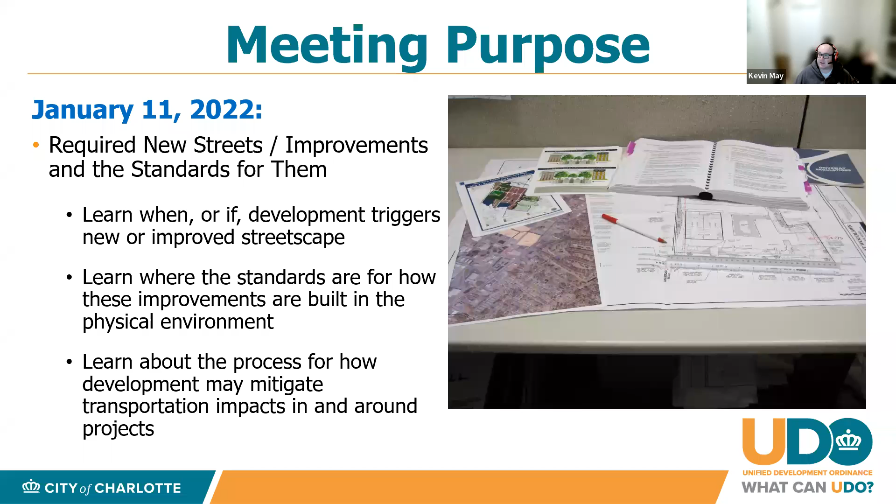Some of you may be familiar, if you've attended previous sessions, with the key dates for the Unified Development Ordinance. This may be familiar to you, but I do want to point out a couple of things because we had some late breaking developments as of the council meeting yesterday, specifically concerning our public engagement efforts and the acceptance of public comments with this first draft of the Unified Development Ordinance.

We released the first draft in October of 2021. We were engaged in public comment and continue to accept comments on that first draft from October until an initial deadline of the middle of this month, January, but that has now been extended an additional two months. We will continue our engagement efforts and accept comments on the first draft from the public until March 18th, 2022. At that point, and starting now and continuing, we will review those first draft comments.

We'll also prepare a red line version of the second draft with revisions as we make them. That second draft will become a public hearing draft that we anticipate being completed in May 2022 for a public hearing in front of the City Council in June. That same month, we're going to be seeking a planning committee recommendation, and currently we're on target for hopefully an approved adoption of the UDO in July 2022.

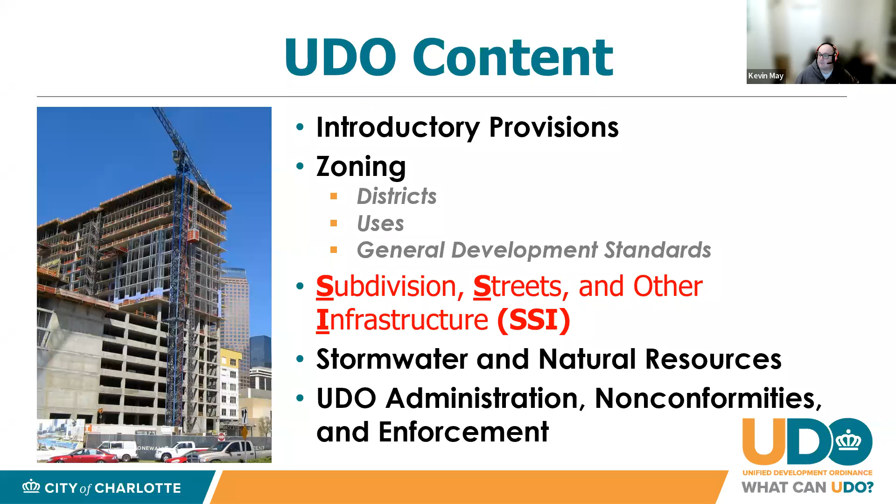In that SSI part of the UDO, which is part 10, it's broken out into 6 separate articles. We have an introduction article, an article that details the subdivision process, Article 32, which we covered a lot when we had our first UDO virtual conversation on SSI in December, which has to do with network cross-access and driveway regulations. We also touched a little bit in December, and will again tonight, on Article 34, standards for streets, off-street public paths and cross-access. A very good portion of our discussion tonight centers on Article 33, required new streets and transportation improvements. Also important, when we talk about infrastructure, we have Article 35, on other infrastructure, which details things like water supply and wastewater sewer.

With that prefacing and context, I'll now turn the presentation over to our subdivision administrator, Josh Weaver, and he'll walk you through the next couple of slides. Josh.

Thanks, Kevin. So there's 2 basic buckets of streets in the city of Charlotte: there's arterials, and then there's the local and collector streets. Arterials, such as parkways, boulevards, and avenues listed below, range from higher traffic, more auto-oriented, higher volume, higher speed roads like parkways, to main streets that are more direct access, lower speed, lower volume, and more pedestrian-oriented roads. Next slide.

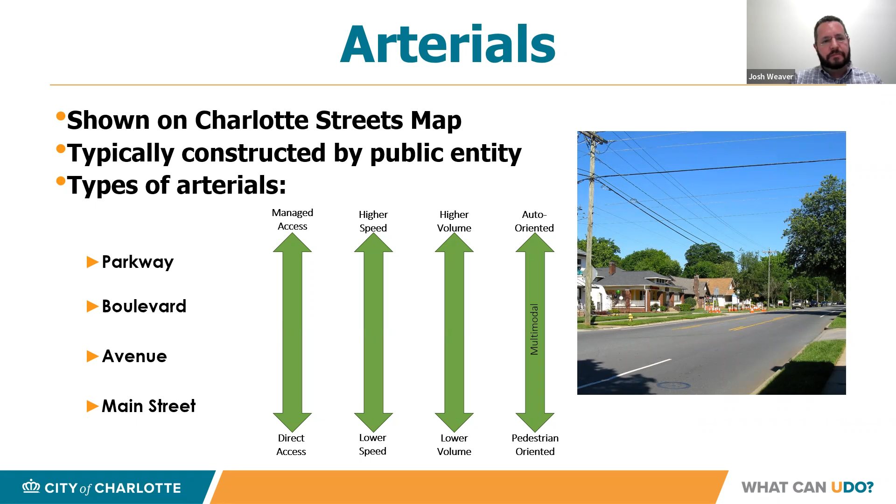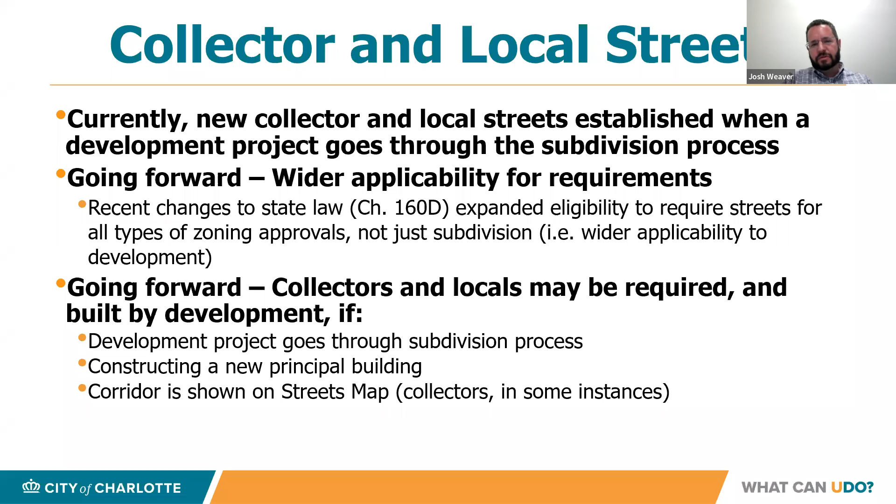So collector and local streets historically have been built through the subdivision process. As development occurs, developers also build new streets. However, with this change in state law 160D, new streets moving forward with the UDO can also be required through zoning reviews, not just subdivision reviews. Local and collector streets may be required through the subdivision process if a new principal building is being built, or if there's a street corridor shown on the streets map. Next slide.

We went over last time a lot about how new development builds streets and how those street spacings are determined, with preferred and maximum block lengths that are currently in the subdivision ordinance but are being revised with the UDO. Currently they're more zoning based, and with the UDO they'll be more place type based. We've also adjusted those maximum and preferred block lengths for regional activity centers, for manufacturing and logistics, and we've added preferred and maximum block lengths for parks and preserves.

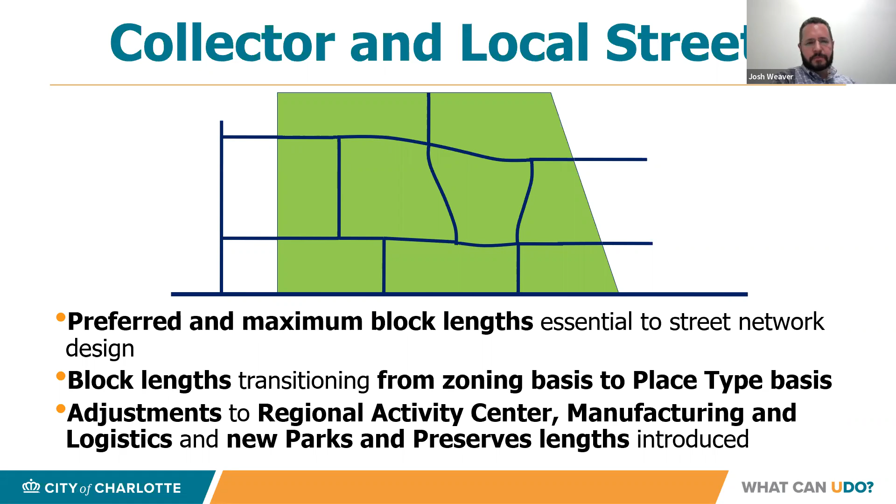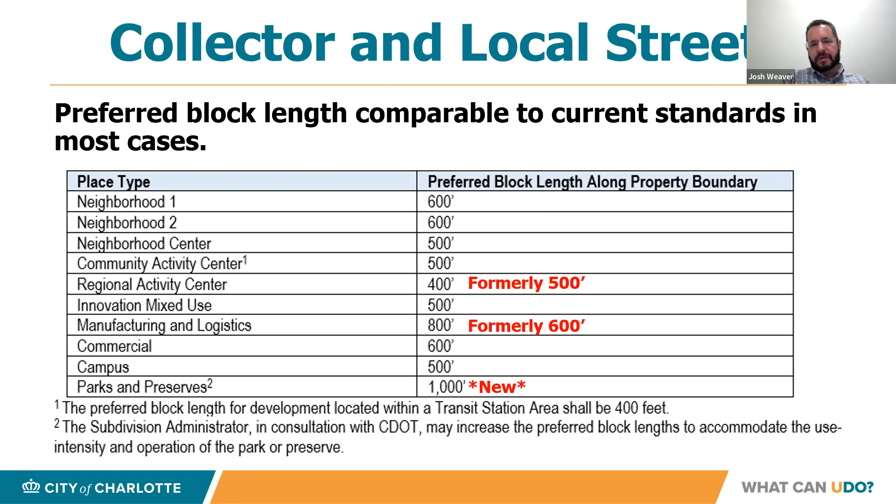So the preferred block lengths, for the most part, are staying very similar to what we have in the current subdivision ordinance. However, for regional activity centers, we're actually reducing the preferred block length from 500 to 400. We're finding in manufacturing logistics that the 600 preferred block length is really not realistic, so we're increasing that to 800, and we're adding a 1,000-foot preferred block length in parks and preserves. Next slide.

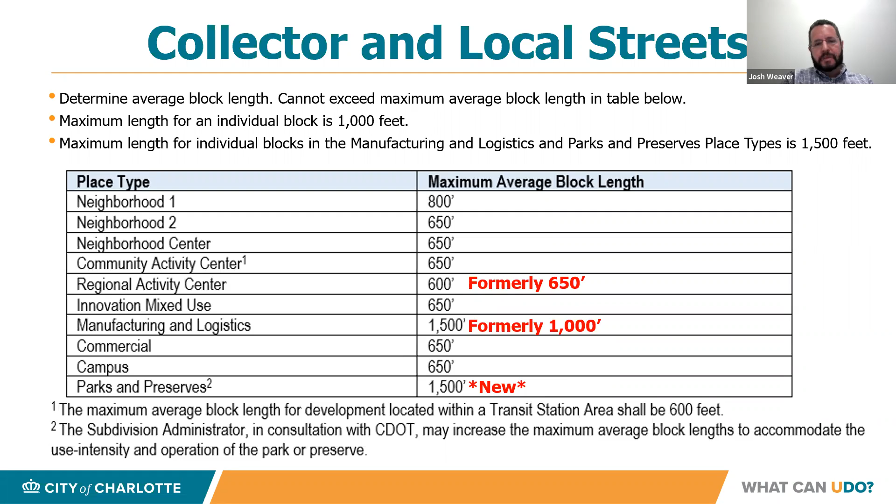We're also adjusting the maximum block length for local and collector streets. For regional activity centers, we're decreasing the maximum from 650 to 600. We're actually increasing the maximum for manufacturing logistics and adding more criteria for when that maximum can be increased. And in parks and preserves, we're adding a maximum of 1,500 feet. Tracy, we'll go to you.

Thanks, Josh. Really just to kind of wrap up the information on new streets that Josh has just talked about, I wanted to provide a little bit of information about where you find the standards and the information about new streets. I would add to the two buckets Josh talked about, perhaps a third bucket that's not really streets, but can be roadways that people will think about when they think about how they get around the city. So we've added limited access here. We just want to show where you find the information about these different kinds of streets and roadways.

So limited access roadways are shown on the streets map, but that's basically just for locational reasons — there are no design standards or expectations shown for those roadways. Arterials, as Josh pointed out, are on the streets map, and the standards are also found on the streets map. These are streets, like in the drawing at the bottom, sometimes referred to as thoroughfares, the larger streets. Collectors and locals: collectors are on the streets map in some cases but not all, because there are criteria in the UDO that define certain streets that might be required as collectors. Locals are not on the streets map at all, except in very limited circumstances related to trails. So the standards for both collectors and locals are found in the Land Development Standards Manual. This is just a simple way to look at where you find information about the different types of streets. Next slide, please.

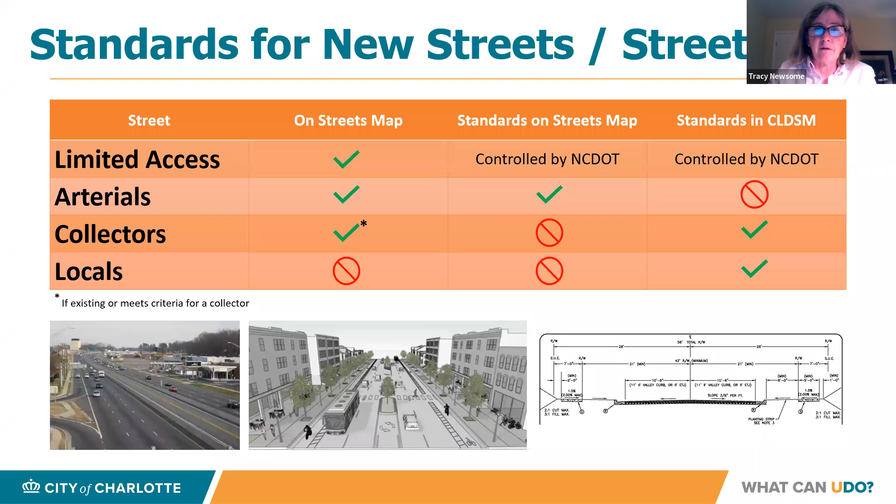But just briefly, there are 3 components to the Streets Manual. There's some documentation that describes the streets map and the way the streets map is built and the policies that are in it. There is the driveway and access rules portion of the Streets Manual, and what this is, essentially, is our current driveway manual with some refinements to incorporate place types. It basically updates that manual to reflect place types, and also takes out the parts that have now been brought into the UDO, which we described in a meeting like this in December.

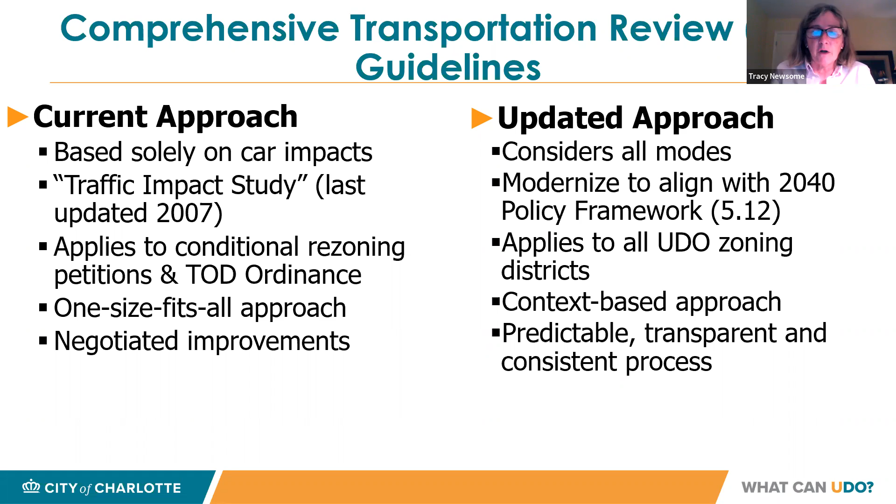Our current approach focuses on negotiated improvements as part of the mitigations. Under the updated approach with the CTR, the process is more predictable, transparent, and consistent. There are menus of options for mitigations, for example, and specific ways you go through the development of the assessment and those mitigations. So we go from a negotiated to a more predictable and transparent process. Next slide, please.

Just taking one little further dive into the details, but not very detailed, just to further show how we're aligning our policies with this assessment, the CTR.

The CTR includes three types of assessments: a multimodal assessment that focuses on moving people, not just cars; a transportation demand management, or TDM, assessment that focuses on reducing single occupant vehicle trips in certain high intensity environments; and because we still have to look at the effects of development on traffic and congestion, we also have a traffic impact study element.

We still maintain that. So these three types of assessment allow us to create context-based assessments and mitigations. And the reason we want to do this is we want the outcomes to be appropriate to the context, which reflects a better alignment with our policies overall.

So, for example, in higher intensity districts and place types, the focus might be more on multimodal and TDM improvements and assessments, whereas in lower intensity districts, you're still going to have a multimodal focus, but you're also going to emphasize vehicular improvements, similar to the more traditional TIS.

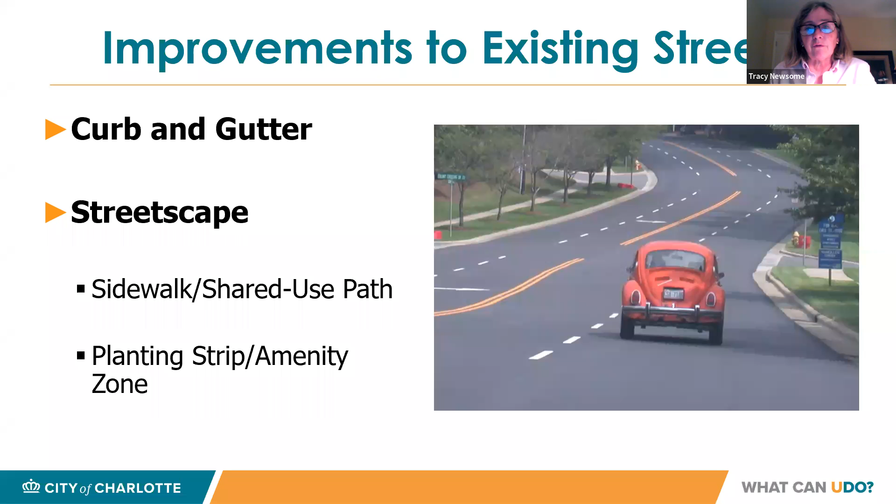Before I go into the actual regulations, just a little bit of context to lay the groundwork. The regulations and the way they're laid out in the UDO are based on melding together the approaches developed as part of the transit-oriented development ordinance updated in 2019, and existing requirements in current ordinance, such as chapter 19 of the city code. So melding those two, the existing requirements with the new approaches, we've refined those requirements to reflect context, specifically based on place types and street types, to make sure we've got the appropriate regulations for each context.

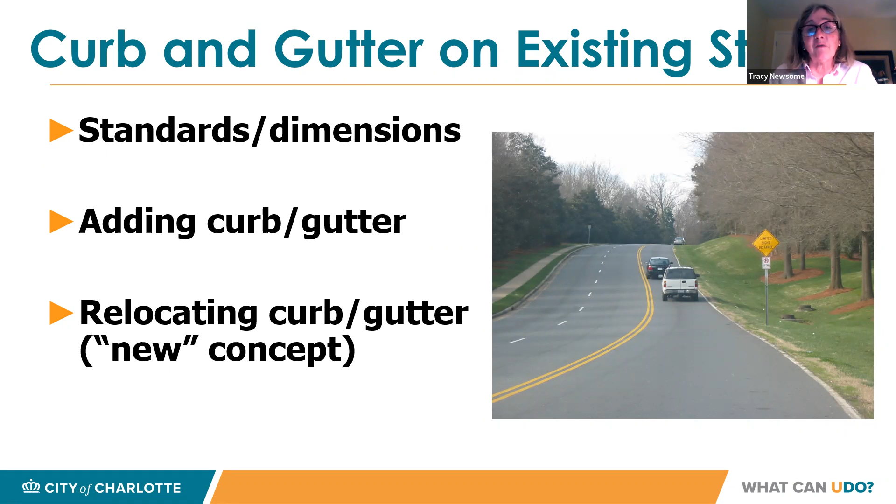So we'll start with curb and gutter on existing streets. What we're talking about here is when you've got an existing street and you need to know whether a development coming in is going to need to do anything with curb and gutter. I'll walk through briefly the standards and dimensions, then we'll talk about what happens when there is no existing curb and gutter, like the situation on the right side of this street, and the rules about relocating curb and gutter when it does exist but might not be in the place that it ultimately needs to be.

So in terms of standards for curb and gutter, we can look at two types of standards included in the UDO. One is the design for the curb and gutter, and the other is the location of the curb and gutter. When we talk about design, we basically mean what type of curb does it need to be.

Can it be a valley curb? Does it have to be a standard curb? And so forth - all of that information is in this chapter that, as Kevin points out, we call SSI for short. So the type that's required or allowed is defined in SSI.

The Charlotte Land Development Standards Manual provides the construction details for those. The other standard has to do with the location of the curb itself, the future curb. This is important because a lot of the regulations even in other parts of the UDO are tied to that curb location - for example, setbacks for buildings and so forth. So it's important that we have a good tool to make it very clear where that exists.

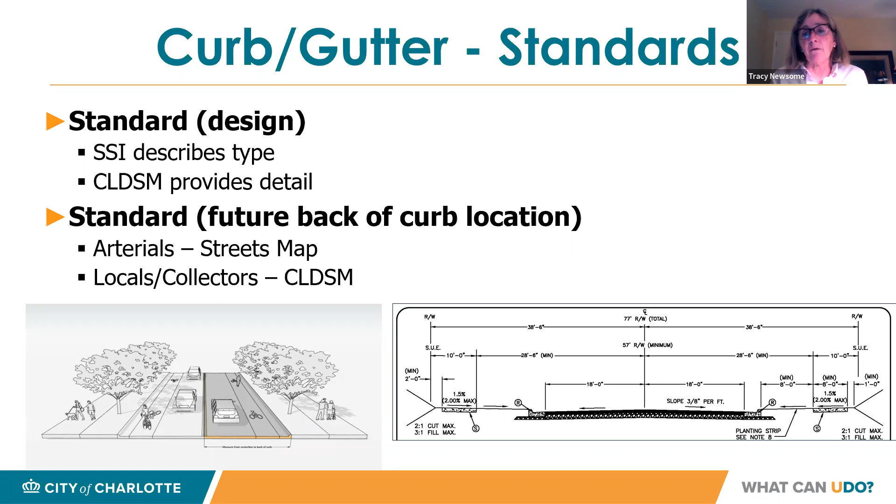For arterial streets, the larger thoroughfare type streets, that information is found on the streets map. If you look at the little diagram on the bottom left, you can see we clearly point out where the back of curb would be, which makes it easier for folks to apply the UDO. For local and collector streets, that's not necessarily on the streets map. The standards for defining where the curb is and the design for that are found in the cross sections located in the Land Development Standards Manual, similar to what's shown on the bottom right here.

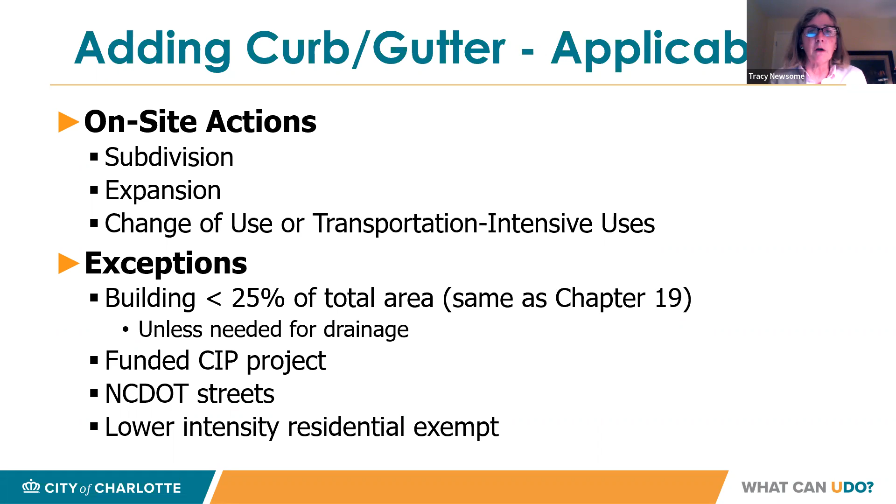Next, please. So relocating - what happens when you've got curb and gutter, but it's not in the right location? Because again, the streets map for arterials, for example, shows where that future curb and gutter needs to be to provide the kinds of multimodal streets we're building. So this is listed as a new concept.

It's really more correct to probably say it's an expanded concept, but currently curb might be relocated and rebuilt and moved as a result of a requirement from a traffic impact study. For example, it might be moved to accommodate a turn lane, maybe through conditional rezonings or other types of plan approvals. There are instances where the curb and gutter would be relocated. So the concept itself is not new. What is new is a broader application of the concept, and it's also set up with rules to clarify and make it more clear when the curb and gutter would be required to be relocated.

Now I'll go into a little bit of detail on that, but I want to start by saying why are we doing this? We're doing this because it provides more clarity and predictability for how incremental street improvements would occur. It's a more systematic way for us to continue to build out our multimodal street network. And ultimately, along with our capital projects through the CIP, it gets us further along in terms of actually building the multimodal streets that our policies are asking of us, or telling us we need to do.

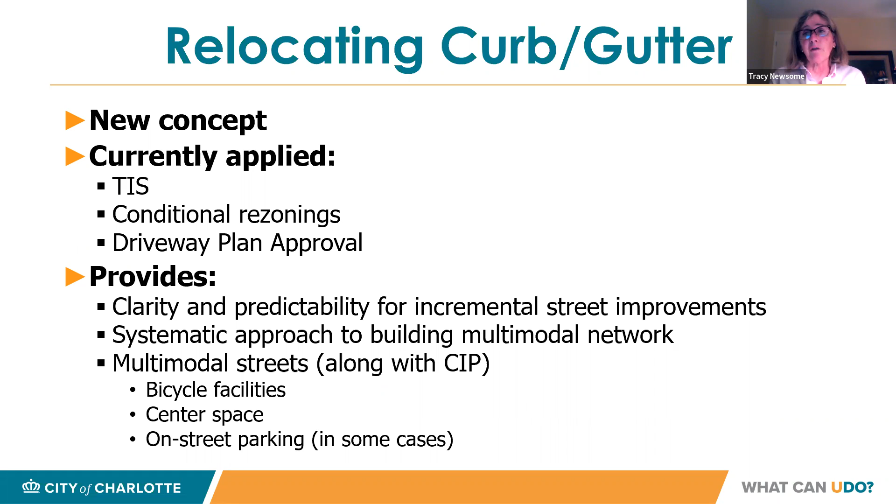So by moving the curb, we may be able to have space for bicycle facilities, or for center space to provide safer turning for motorists or safer crossings for pedestrians, for example. Next, please.

So in terms of the applicability of relocating curb and gutter in the UDO, basically, when would this be required as a part of a development?

The biggest key in terms of this is an expanded concept, that is, it does apply to by-right development. The triggers would apply to all by-right development. It doesn't mean every by-right development would do it, but it would at least be looked at. The triggers themselves and requirements for whether curb and gutter would need to be relocated are scaled, because it can't be a one-size-fits-all application. It's really scaled to reflect what the project is doing and the location of that project.

So specifically, when you look at the language, what it's intended to do is ask the question: what are you doing on site? What's happening on site? How much development is occurring? How much change is occurring on the site? And in addition, you would look at what the context is. What kind of place type is it in? What kind of district is it in? And what's the street type?

So what this means is, if you come in, it's like a sliding scale. If you come in with a large development in a high intensity place type on an arterial, you're more likely to be required to relocate the curb and gutter than if you come in with a small development in a lower intensity place type on a collector street, for example.

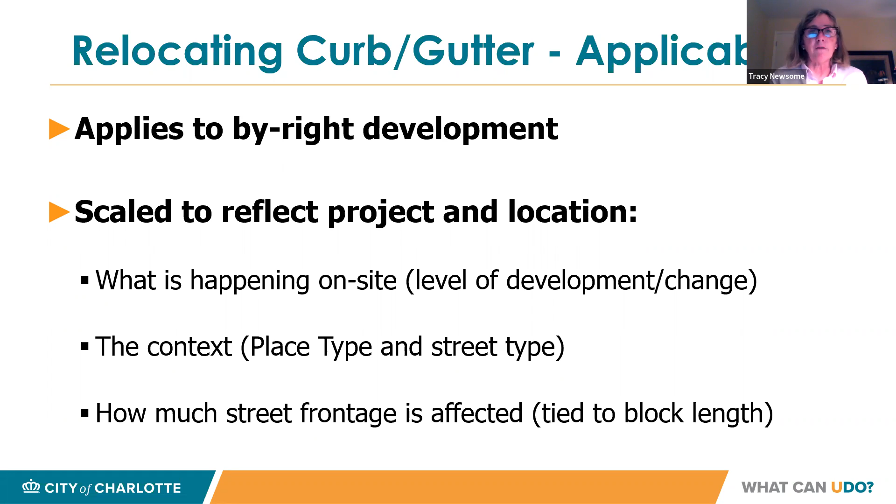Next, please. So even with those rules in place, that sliding scale to look at the triggers and see where it makes sense to require the curb and gutter being moved, it's recognized that there are still case-by-case circumstances or unique situations where even those rules may not apply. So there are exceptions and modifications built in.

Again, I'm not going to necessarily go through each one of these. If you have specific questions, you can ask about it. But the exceptions are for things as varied as preserving heritage trees or large stands of trees that could be affected by moving the curb. Moving the curb could have a stormwater or drainage related issue that could not be designed out of, or could become worsened. So we would want to try to fix that. If it can't be, then obviously there's an exception for that.

The key to all of this in terms of the exceptions and modifications is that even if the curb is not required to be relocated, that doesn't override that future curb location. It simply says that in the interim, that curb doesn't have to move. It's not going to be required to be moved, but all of the other details that are measured from that future curb location are maintained.

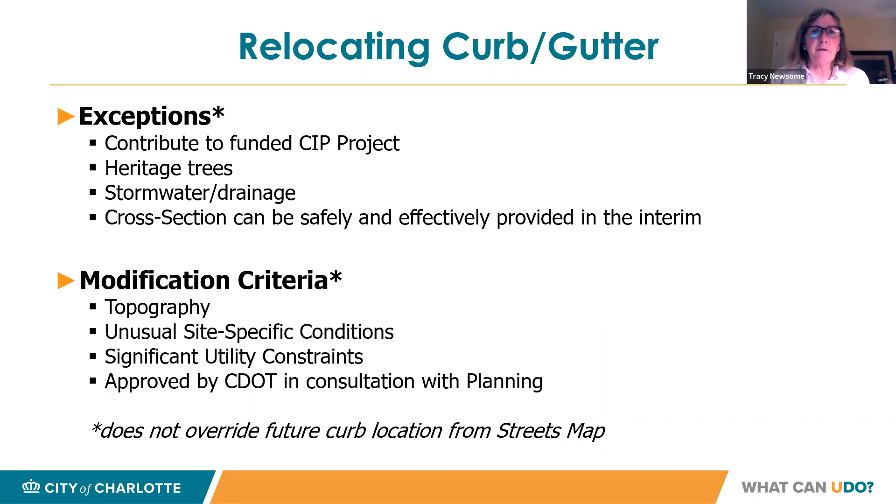Next, please. Okay, so that's the situation and the information about curb and gutter. Now we'll talk about streetscape. Again, we'll use a similar approach. We'll talk about standards and dimensions, and then quickly talk about what happens when there is no existing streetscape, like the bottom two left pictures here on existing streets, where there needs to be appropriate requirements for adding the streetscape. And then also what happens and what triggers the need to update streetscape when it is substandard.

Sorry, I have an audience. It's not enjoying this. Could you go back for just a second?

So updating the streetscape would happen when you have a substandard situation like that on the right, where you have a sidewalk at the back of curb.

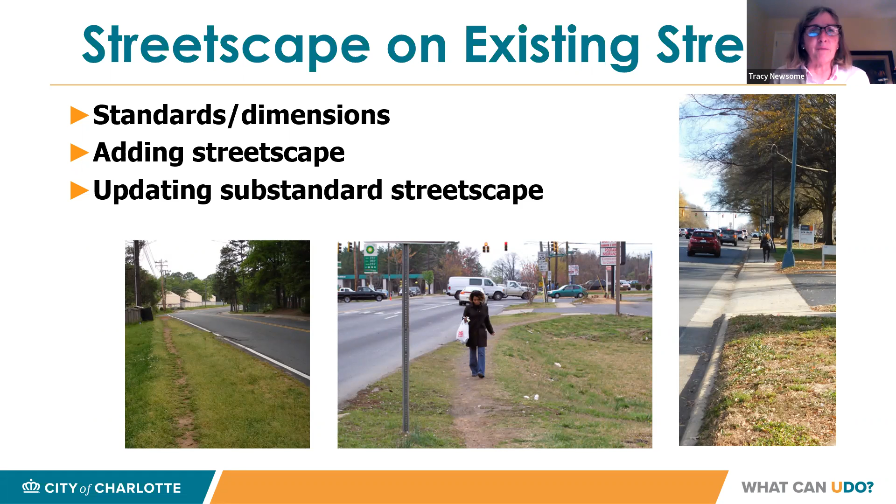First, standards and dimensions. This first statement probably sounds a little strange: always behind the future back of curb. This goes to the location of the future back of curb. It's set up so that no matter whether the curb moves or not, the streetscape will be put in the right location for the future.

The sidewalk widths are context-based. If you look at this table, you see street type and whether it's a lower intensity place or a higher intensity place, and a variety of different widths based on that context. For example, in a lower intensity place on most arterials, you'll have either a 6-foot minimum sidewalk, or in some cases, a shared use path. In a higher intensity place, you'd have an 8-foot sidewalk, or in rare instances, a shared use path. They're somewhat less appropriate in high intensity places.

A main street, as Josh pointed out, is a special kind of street. This is our most pedestrian oriented arterial type street on the streets map, and the sidewalk width would be 10 feet there. I think a key thing is that citywide, the UDO is now referencing a 6-foot minimum sidewalk width. So if you look at locals and collectors, depending on the intensity of the place type, they're typically going to be 6 or 8-foot sidewalks. Current ordinance allows for 5-foot sidewalks in some circumstances.

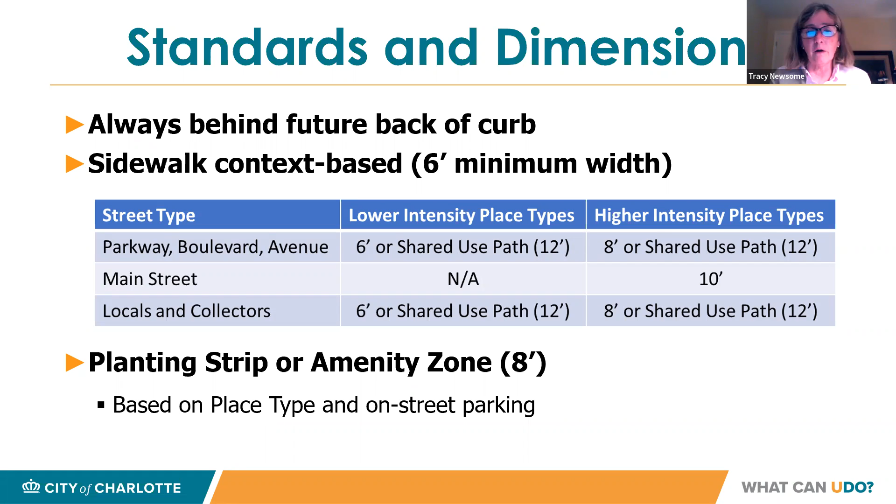So in terms of applicability of streetscape, this isn't broken out by whether you're adding or updating streetscape. It's just to say there's a broad range of actions that occur on site that could trigger whether you'd either add a sidewalk or update a substandard one. Those range from doing a subdivision to building a new principal structure. Both of those would apply to either adding or updating a sidewalk.

The other items here are kind of a sliding scale of what you're doing on the site, and whether you're missing a sidewalk totally or have a substandard sidewalk. I won't necessarily go into that, except to say these are the things that might trigger the need to add streetscape or improve it. The exceptions here: most development in the N1 place type is exempt from the streetscape standards, and most existing development is exempt from this.

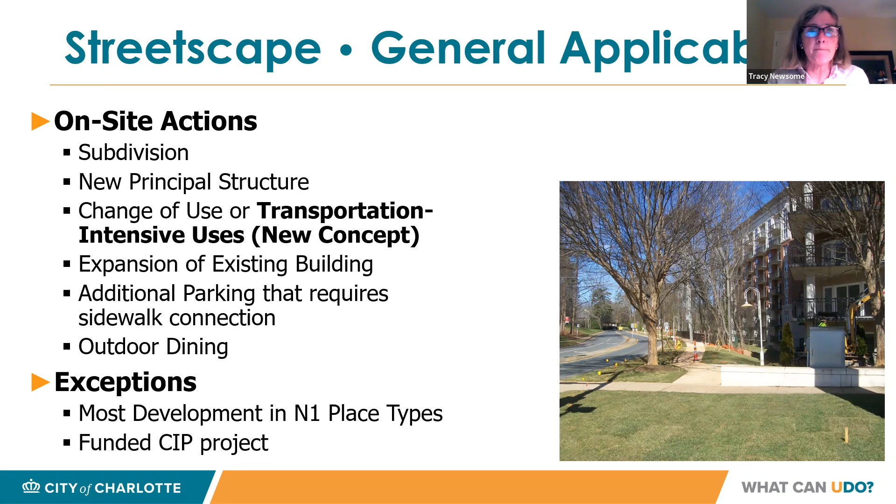In a couple of places, there's been a reference to transportation intensive uses as a trigger that might create the need to either move the curb and gutter or add a sidewalk or update a sidewalk. That's a new concept, and I want to spend a little time explaining that.

As a trigger, it's typically going to be referenced in the UDO as a change of use or a change to a transportation intensive use. Change of use in the UDO is defined as a change from one major land use category to another—so the example here is an industrial category to a commercial category. That can mean something for certain types of requirements, but from the standpoint of streetscape and what's happening on the street, it doesn't really account for significant changes within one of those categories.

For example, you could have in the commercial category a car repair facility that transitions over time and changes to a restaurant or a bar. That has a very different impact, even though it's within the same category of use—a very different impact on how the street is used and the need for multimodal streets. So this idea of transportation intensive uses is that the UDO spells out some specific uses that, if you change to them, it counts similar to a change of use.

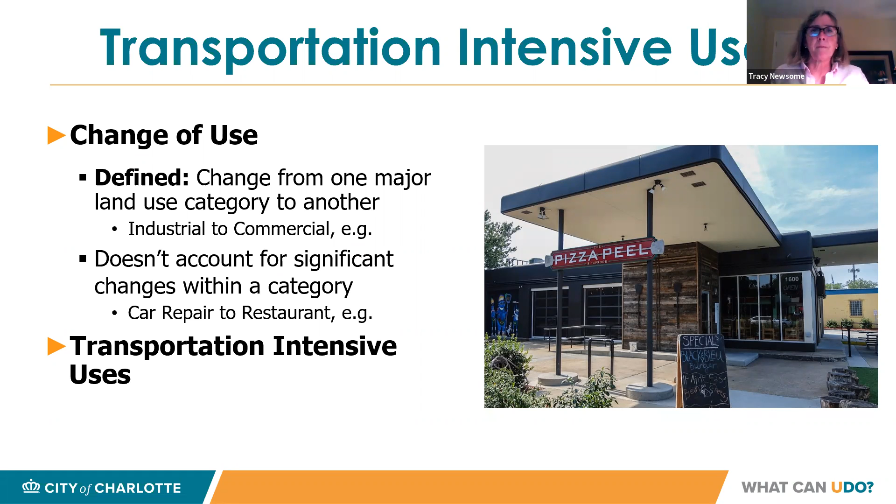So we talked a little bit about adding sidewalk where it doesn't currently exist, and there's also a provision for updating substandard sidewalk and streetscape. This is a hybrid of some existing ordinance. In chapter 19 of the current ordinance, and in the TOD ordinance adopted in 2019, there are approaches and regulations about updating substandard streetscape.

It has been refined for the UDO to reflect all place types, because it really needs to apply across the city, for all places, place types, and all uses.

So again, whether or not this is triggered is kind of a sliding scale. It depends on what's happening on the site, how intensive the development is, and how substandard the sidewalk is. This requirement would be triggered if either the sidewalk or the planting strip is substandard.

We've got a definition of how the UDO defines substandard for streetscape. Not to go into the weeds, but one way to make this reflect all place types is to say if the sidewalk or shared use path is not within 2 feet of the standard width, it needs to be updated, if you've met those other triggers. And since planting strips are expected to be 8 feet, if they're less than 6 feet, that counts as a substandard streetscape as well.

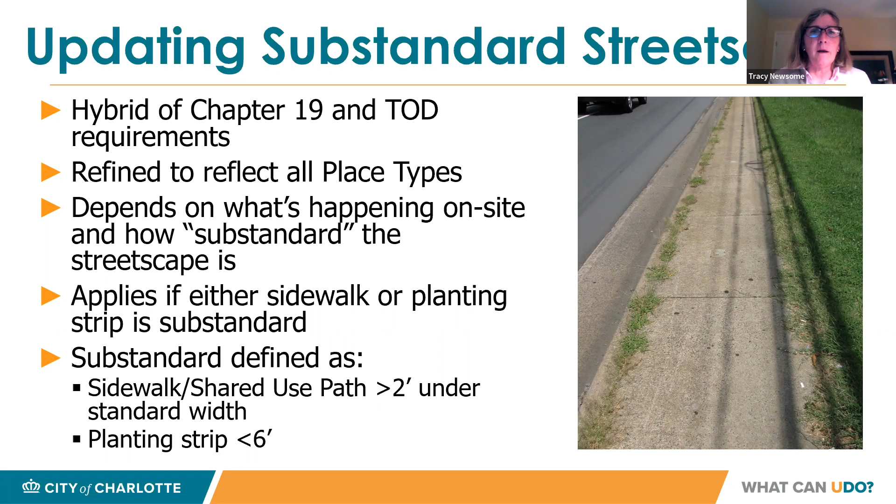Finally, to wrap up streetscape, whether you're adding sidewalks and streetscape or updating it, as with the other regulations, there are modifications to the standards, or in some cases the requirement overall, for a variety of reasons, case by case. A couple of key things the UDO provides more specific guidance on have to do with tree preservation and constrained space.

In places where there are heritage trees or large stands of mature trees, the streetscape exactly as dimensioned and sidewalk exactly as located may not work as well. We can preserve some trees potentially, but we need to provide information about how, if you can't do the standard, you find an alternative location that still meets the intent.

Similarly, there's constrained space guidance. If you look at the photo on the right, let's say you want to reuse an existing building — the building's not going to move, but there's not space for the standard streetscape. There's specific step-by-step information in the UDO about how to allocate the space to get a streetscape that works best within that constrained space.

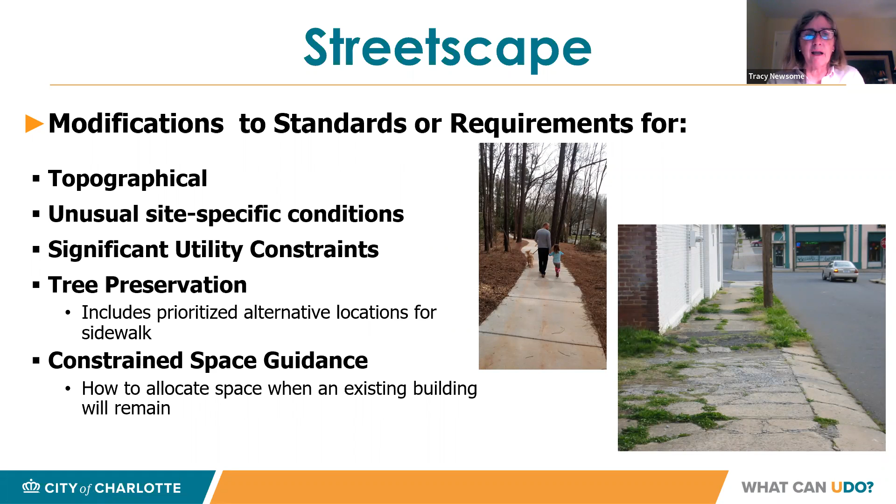As I've walked through, I've tried to point out that by virtue of the way the triggers are set up for requirements, the exceptions built in, and some of the opportunities for modification, there's a fair amount of flexibility built into the requirements.

There's also a section in the UDO called transportation adjustments. What that does is spell out that some of those standards may be adjusted if it's determined that the standard needs to be more proportional to what's happening and to the impact of the development. So there is this section that allows some flexibility, limited only to make the standard more related to, or proportional to, the impacts.

There's a table that tells what those standards are. It identifies which director of which department makes that decision, and then any appeals to that would go to a board of adjustment. I think that's the last slide I was going to go through.

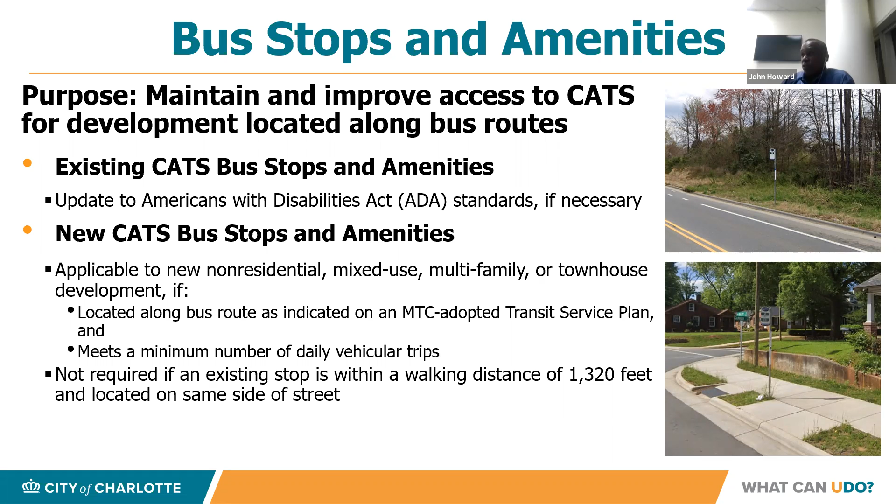Any new stop or amenity must be designed to CATS standards, which can be found in the Charlotte Land Development Manual. Private bus stops would also have to be reviewed by CATS.

Not all situations will require all of these things. It depends on the physical space allowed and the development density, to see if the shelter would make sense. Otherwise, in most situations, it would just be the concrete bus waiting pad behind the curb. The same goes for non-CATS bus stops and amenities, and the same rules apply.

Exceptions to those improvements would be steep slopes where there isn't space behind the curb to put anything in, any kind of intersection or driveway conflicts, and overall any unsafe conditions for transit system operators, drivers, pedestrians, and bicyclists. So those are your exceptions for the most part.

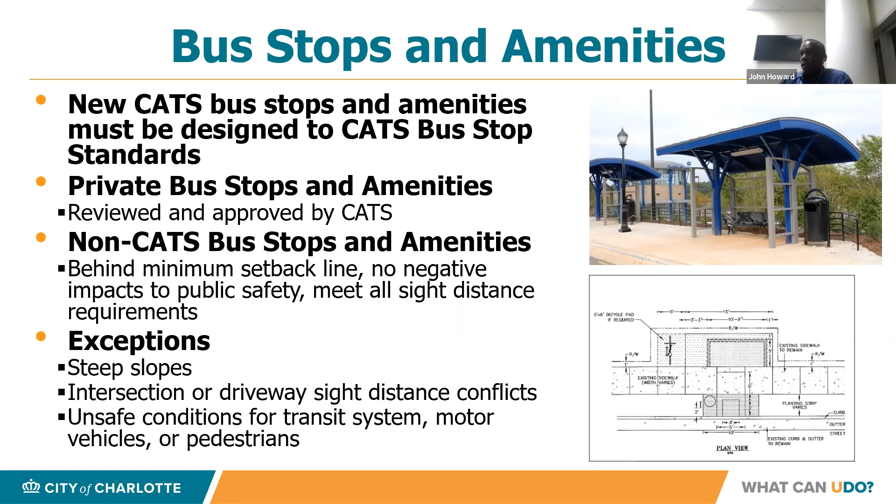Couple of slides here towards the end of our presentation where I'm going to let people know about some of the valuable resources out there for you to engage with this UDO project and provide your input.

First, I want to give a plug to all our public engagement team members on the UDO team for our UDO website, which can be visited at www.charlotteudo.org. From there, you can access the complete first public draft of the UDO, as well as link to the online portal, which will allow you to submit comments and questions about that draft.

Also on our UDO website, you'll find other valuable information such as schedules, upcoming meetings, some important supporting reference documents mentioned in the UDO, as well as frequently asked questions and their answers, and more.

Because we understand that looking through a 608-page development ordinance can be difficult, even for us internally, we've crafted a handy 26-page reference guide that is also available online and can be accessed through the helpful resources tab of the UDO website.